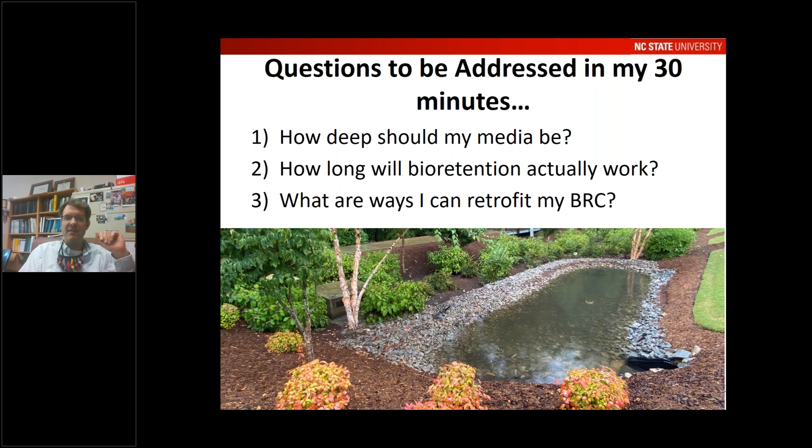Another thing, now that practices have been in the ground for a while, we can much better assess how long the bioretention cells are going to work. So we'll look into that for a little bit, and then I'm going to close with multiple ways that you can take a practice that works well and actually make it work even better. So how can you retrofit a bioretention cell, and what type of benefits do you get out of that retrofit?

So in North Carolina, like much of the Chesapeake Bay to our north, we really worry about nitrogen and phosphorus. It has led to major lake closures. Excess nitrogen and phosphorus leads to hypoxic zones, fish kills, and the like. And as a result, a lot of what we have done in North Carolina has focused on how to better manage nutrients coming off stormwater.

So I want to ask y'all to get some sense of where we're coming from. What pollutant, if you could pick one, do you think sort of motivates the design work or the need for stormwater in your jurisdiction? Jill, I'm going to hand over to you.

We're going to find out what the audience says. Here's our question: in your jurisdiction, what one pollutant's removal concerns you the most? Nutrients, temperature, pathogens, metals, TSS, or other?

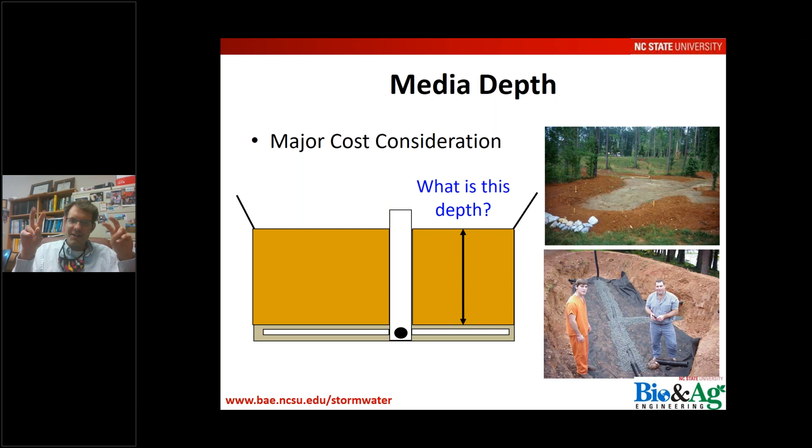And if you were at all involved in bioretention years ago, you knew the answer was 4 feet. That was the default - you got to use 4 feet. Well, first of all, it doesn't really need to be 4 feet much of the time at all, and we'll get into the rationale behind that in a little bit.

When we do decide how deep the media needs to be, it's really predicated upon 3 big factors. One, can your vegetation survive? In fact, not only survive, but in many cases thrive with the amount of media you're providing. Two, are you able to meet hydrologic goals? The more media you have, the better you are able to transition runoff to infiltration or evapotranspiration. Or, what type of water quality needs do you have? What pollutants are you worried about? You're worried about sediment.

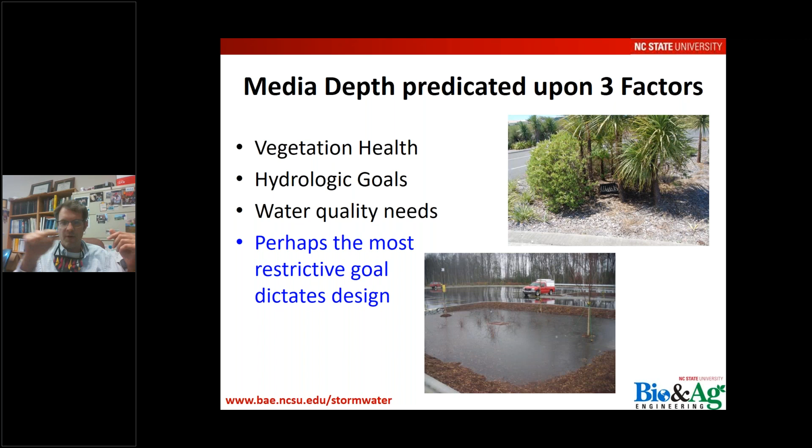But a lot of you are also worried about nitrogen and phosphorus, and a few of you are worried about temperature. Based upon that one pollutant you're worried about, what's your best bet? Whichever answer to those 3 questions - whatever's the most restrictive one - that's the one you're probably going to want to choose.

So let's start off with vegetation depth. Bioretention vegetation actually does not need a ton of media. Grass, which is successfully employed a lot, can handle 1 foot - you can do all right with 1 foot. Shrubs, you add 1.5 feet onto that, and then a tree-shrub mix, the media might be a little bit deeper. Having said that, the deeper you make your media, the more resilient that vegetation is going to be, because there's more moisture available to it during dry periods.

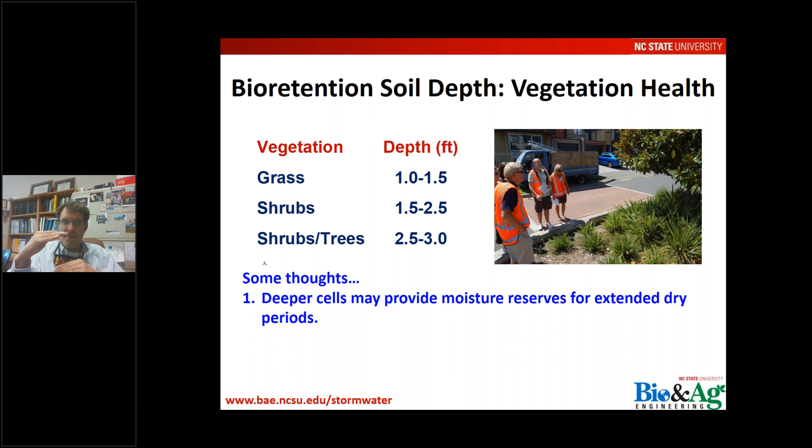But for the most part, we're not observing the vegetation requirement being what dictates that minimum soil depth, which gets us now to the potential for hydrology.

I'm not going to name the big box store that allowed us to study here, but just know there was a big box store that agreed to allow us to do some study at their site.

The purpose of the study initially was to take a look at the benefit of having 2 foot of media versus 3 foot of media as your depth. We also made a retrofit about a year in, which doesn't really show up here, so we actually had 2 sets of monitoring periods. I'm going to talk about data very quickly from both.

What I want you guys to focus on are the 2 depths, the 2 and 3 foot media depth. Before we made this retrofit, when you had a foot of extra media, you put roughly 10% more water into the ground.

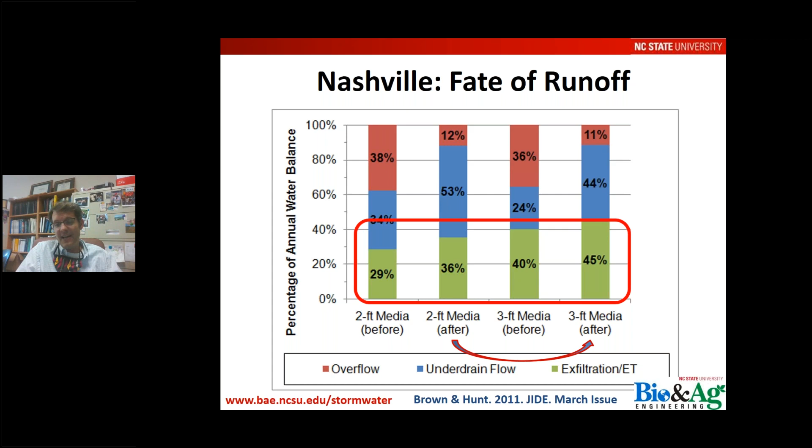After we made our retrofit, we studied it for another year, and again the numbers were different, but we put 10% more water essentially into the ground. So you get some sense of whether that extra 10% of infiltration was worthy of the cost associated with the extra media. Well, that's a site-based situation, but you can at least see that it can matter.

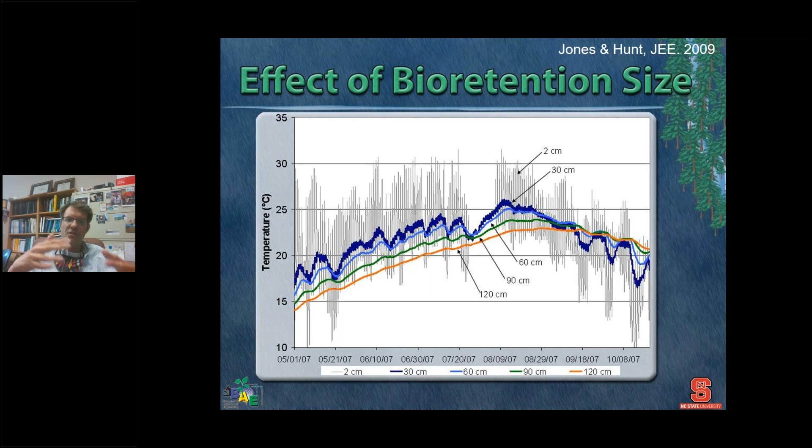Another benefit of having deeper media with respect to certain pollutants is temperature. Only a few of you, maybe 20, are interested in thermal pollution, but you can see here that 120 centimeters or 4 feet deep media gives you cooler and more stable temperatures than 1 foot or 2 foot deep media. So if you're worried about thermal pollution, deeper media certainly does seem to have a legitimate benefit.

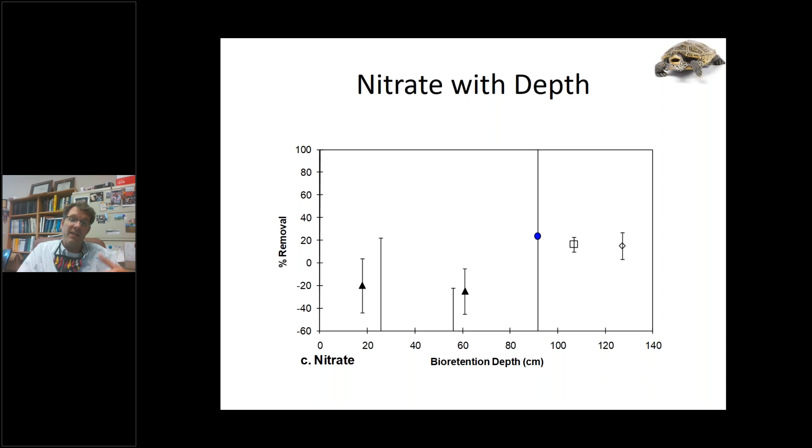Nitrate - this is one of those slides from Dr. Davis, you see a turtle in the upper right-hand corner. After about 3 foot of media, you start seeing some actual reduction in nitrate, whereas with less than 3 foot of media, the nitrate removal was not reliable. So again, this is a case where a pollutant shows more media seems to matter.

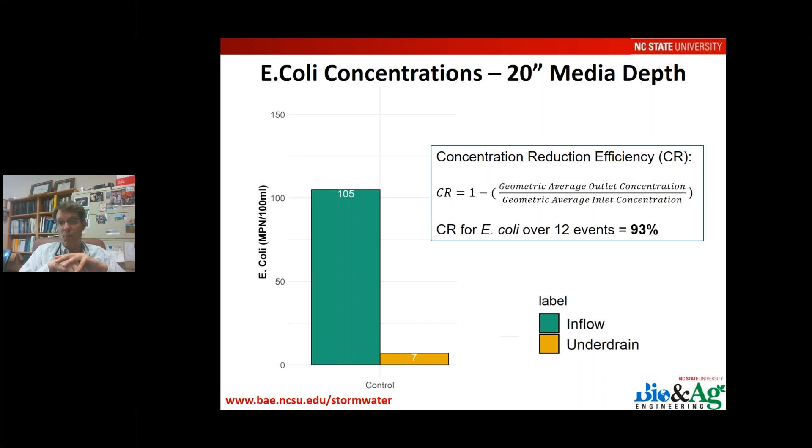We studied a bioretention cell in Wilmington, one of our coastal cities where we have pathogen TMDLs and pathogen concerns. We monitored this one for a little over a year, and it only had 20 inches of media, so it was a very shallow media depth system. And you can see how well it worked - the answer is it worked awesomely. We took out 93% of the E. coli that came in, and the effluent concentration of E. coli was really, really low. So in this case, minor media depth, still great performance.

So really what it comes down to is what pollutants are you worried about. Let's say you're worried about sediment - well, guess where sediment's captured? The surface, right? Sediment gets strained at the surface. So you don't need 4 feet of media to trap sediment. A little bit over half of the phosphorus that's out there hitchhikes with sediment or particulate matter, so if you're straining sediment, you're also straining about half of phosphorus. Now the other third to half of phosphorus is a little more complicated - it's in the dissolved state, and that will tend to get removed in the upper layers of media. So those pollutants tend to get removed at the top or towards the top of the media column.

Now temperature, as I mentioned before, the deeper it is, the better. Nitrogen - deeper systems certainly are better as well. So you'd certainly require more media for trying to remove temperature and nitrogen. But if you get back to pathogens, they get removed at the surface. Metals get removed towards the top of the media, and oils and greases tend to get trapped at the surface and then get broken down.

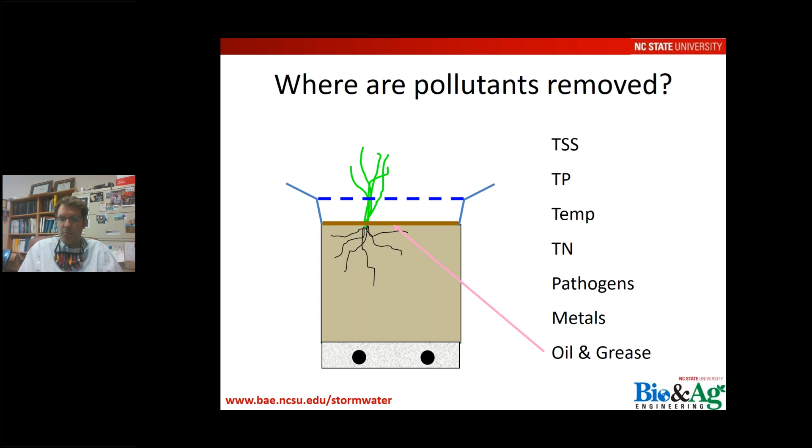So I guess my take-home point is pretty clear: if you need to remove specific pollutants you're trying to remove, that can really dictate how deep your media needs to be.

Now, I know this paper is getting close to a decade old. I still love it - I honestly don't think it's dated. Just a smidge, but for the most part, it's still some work I did with Doctors Davis at Maryland and Traver at Villanova. And we suggest how deep your media depths need to be for certain pollutant removal.

The take-home point for all of this is media depth can absolutely be targeted based upon the type of pollutant you're trying to remove. So sediment and pathogens, shallow systems are going to work fine. If you're trying to get rid of nitrogen or temperature, deeper media depths are going to be needed.

So there's an answer to the first question, which brings us to the second question: I've got this bioretention cell, I've had it for a while, I've been maintaining it okay, is it still working? A lot of people have asked this because, frankly, bioretention cells have been used in Maryland for over 25 years, so these practices are getting a little bit longer in the tooth.

I'm going to answer this question with a couple of studies we did. We did a project in Charlotte, North Carolina's largest city, about 15 years ago, and looked at how well a bioretention cell worked then. Then 11 years after that study, we got a call from my buddies in Charlotte saying this bioretention cell is going to get taken away because they're building a light rail station. Would we be interested in doing some destructive testing, basically digging holes and mapping the surface of the bioretention cell?

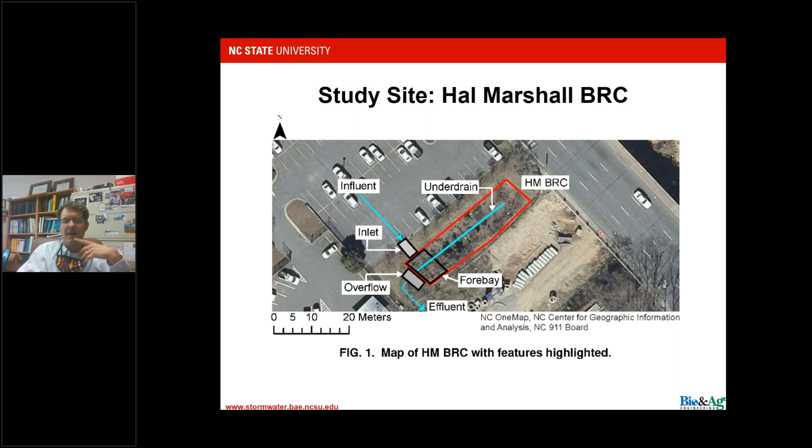This is what the bioretention cell looked like, per NC OneMap, North Carolina. Water came in from the parking lot, entered a forebay, spread out across the footprint of the bioretention cell, and if the water level got sufficiently deep, it overflowed. You can see the student going down there collecting samples, digging holes, sending these things off to the NCDA lab and the like.

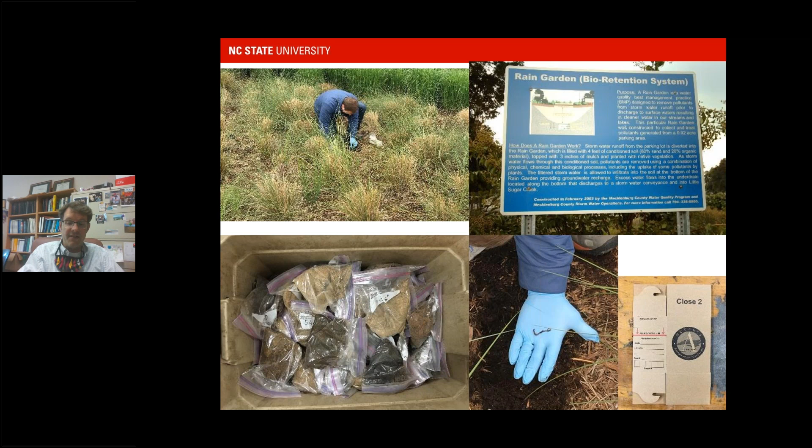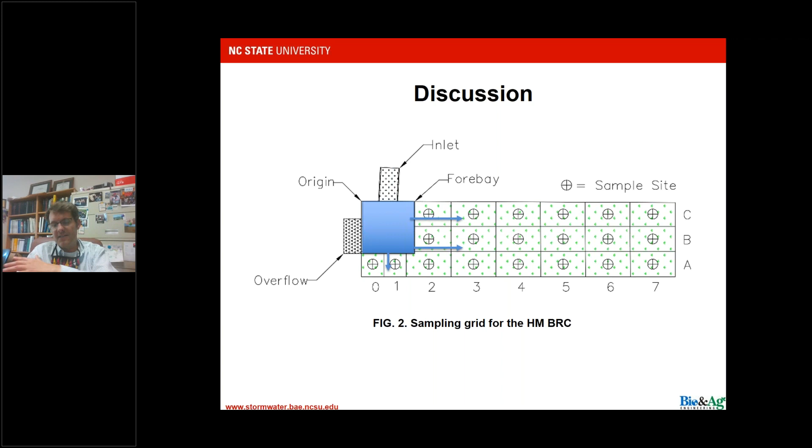He took samples from everywhere you see the bullseye, from the forebay, which is just getting covered up now, and from the balance of that bioretention cell. From that information we were able to create a heat map, which shows you where you have high concentrations versus not having high concentrations of pollutants.

We looked at zinc, copper, phosphorus, and humic matter. Anywhere that's green means you've got plenty of capacity to capture that copper, zinc, or phosphorus. Anywhere that's red means you're getting close to the edge of capacity, and yellow is somewhere in between.

If I go ahead and place that forebay on here, boop, there it is, you can see that the forebay makes a huge difference in terms of the heat map. That's where the pollutants are being trapped. So if you have a forebay and the pollutants are being trapped there, and you do occasional maintenance to suck out the accumulated sediment, that means you're prolonging the life of the rest of the media, which at this point in time is green.

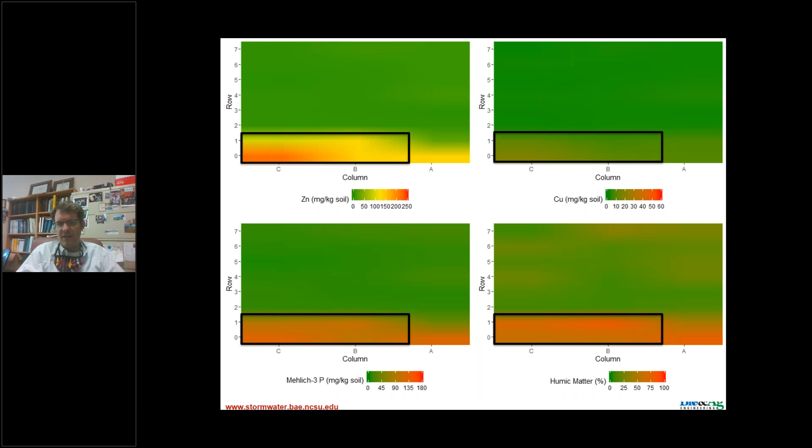We did a calculation based upon the pollutant loadings we had looked at from 11 years prior, and you can see these systems are going to last a long time. You see 300 - we actually had to recalculate it and the numbers aren't quite right. It's still like 500 years, 100 to 500 years. In other words, we're all going to be gone. The zinc and copper are not going to fill this media up while we are upright on this earth.

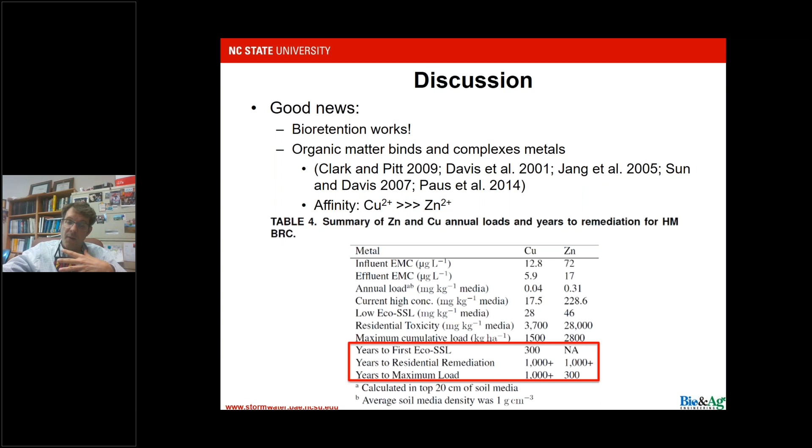So long story short, the inclusion of a forebay means a bioretention cell can work a pretty darn long time at removing things like metals, which about 8% of you were concerned about. So we have excess capacity, particularly for metals.

But what does it mean from a nitrogen and phosphorus standpoint? Does a bioretention cell work long-term for nitrogen and phosphorus? So another chance to go back and take a look at an old project.

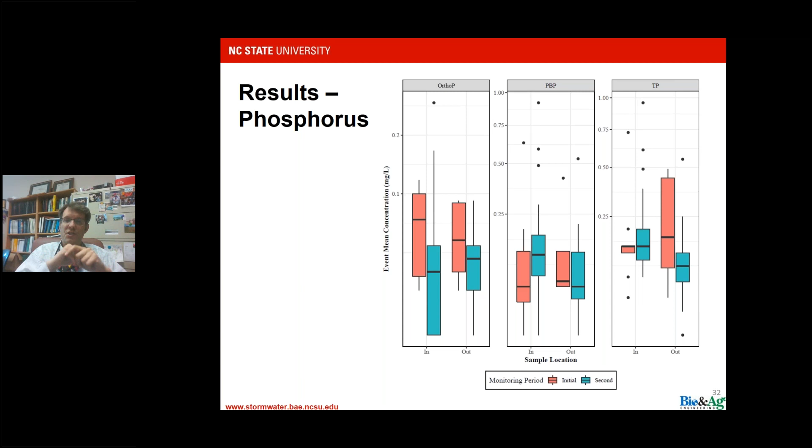It shows up again with phosphorus. Look at the box to the right - that's total phosphorus. You see the red, the concentration of phosphorus actually goes up in 2001, 2002. Without anything other than maintenance being done, the concentrations go down in 2016, 2017. Long story short, this bioretention cell works better with time.

So why is that happening? The number one thing we attribute it to is the maturation of vegetation. Vegetation is our long-term friend, and it's proving to be perhaps the single most important factor to long-term resiliency, not just of bioretention cells, but other stormwater control measures in general. If you want a resilient stormwater control measure, you'd like to see some vegetation in it, certainly for a surface stormwater control measure like bioretention.

Now, what does this mean in the end? Well, it means that when we start setting standards for how well a bioretention cell will work in a certain jurisdiction, it's often based on research done in that jurisdiction. And that research tends to be done on newly installed practices for various reasons.

But what we've gotten a glimpse of is that perhaps these initial assessments are actually undervaluing how well bioretention works over the long term - that we may be getting even more for our money than we've credited ourselves for. It's good to know, good to know.

Now, we also took a look at bioretention cell media as it aged. We looked at 28 sites, from 1-year-old cells to 18-year-old bioretention cells, to get some sense of the content of the media and answer some questions from a design perspective.

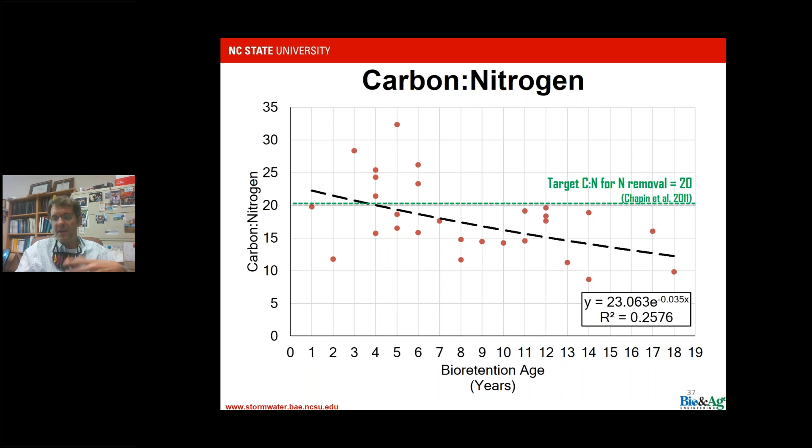Now, the other thing we're able to do with those data, which by the way suggests they're able to work for a longer period of time, is run a random forest - like a decision tree, but fancy computer stuff.

You can take a look at the most important factors associated with higher carbon-to-nitrogen ratios or lower levels of embedded phosphorus in the media. You can see things like a forebay stands out - if you have a forebay, that means the balance of your bioretention cell likely has a more favorable carbon-to-nitrogen ratio for nitrogen removal. And if you have deeper media depth, this shouldn't come as a shock, you're likely to have lower phosphorus saturation across the broad spectrum of your media.

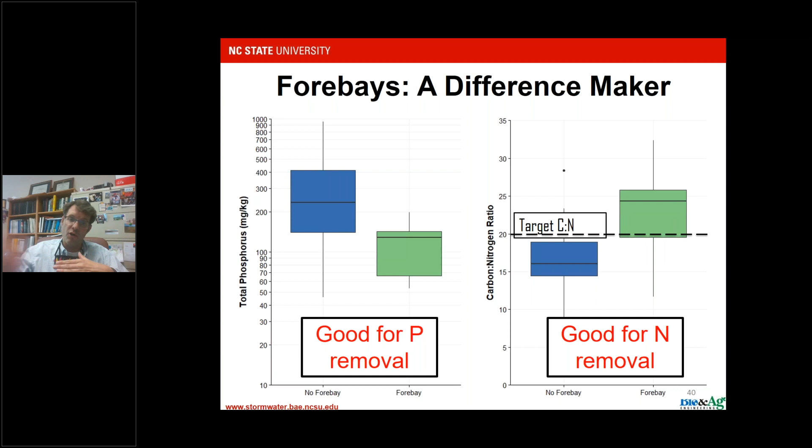One thing that stands out for both of these is the presence of a forebay. If you have a forebay in a bioretention cell, you tend to have lower fractions of phosphorus in the balance of the cell's media, and higher carbon to nitrogen ratios in the balance of the cell's media. So a forebay certainly does appear to matter.

If you're trying to get a bioretention cell to work for a longer period of time, the inclusion of a forebay seems to matter. Which gets us to a discussion on retrofits, and what are some things you can do to take a practice that, I'm just going to be honest, works well to begin with. Bioretention, part of the reason it came to be and has stuck around so long is it works well. That's the reason why things like Filterra work so well—it's modeled, it's a rapid flow bioretention system. So we know these systems, bioretention or a version of it like Filterra, are going to work well for a long period. The question is can you make some of these systems work better?

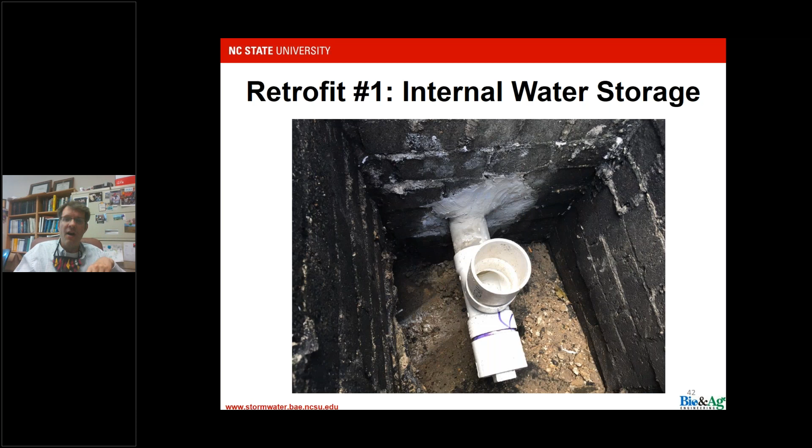I'm going to talk about 4 different retrofits to look at. The first and foremost, which I think is the cheapest and easiest, is something called internal water storage. You're like, okay Bill Hunt, what is internal water storage? We're going to start off by describing what it is a change from, and it's a change from normal under drainage. Here, take a quick look at that.

I got to wet those vocal cords.

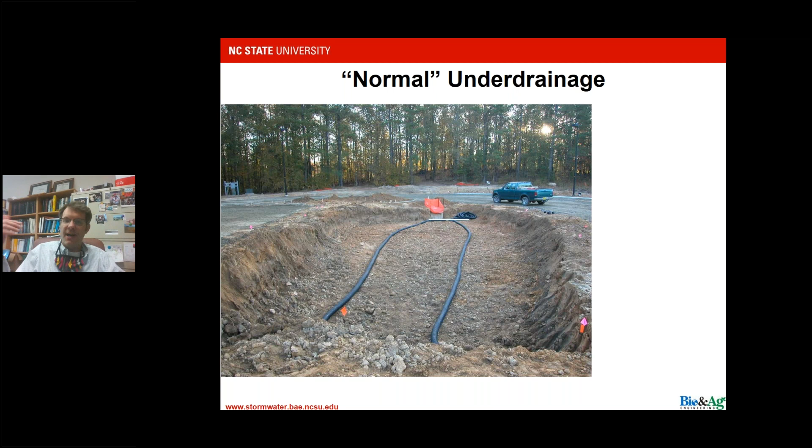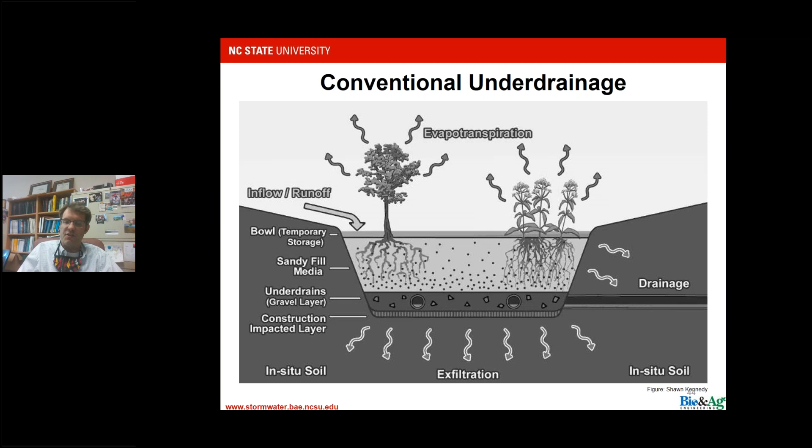So you can see the under drainage ties into the drop inlet. You put your gravel on it. This is the standard under drainage that we've got. It looks like this. This is what most jurisdictions have had in their design 20 years ago, 15 years ago. But we are seeing some jurisdictions, for example in North Carolina, that require a change.

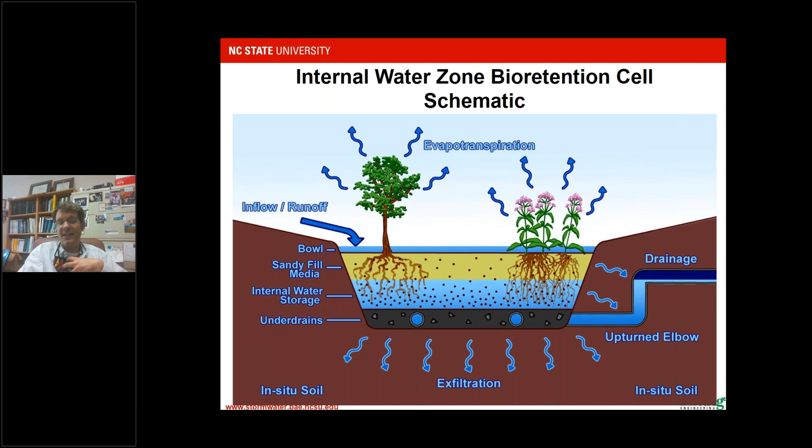And the change is simple. That under drain, instead of tying directly in at that same elevation into the drop structure, you want to elevate that under drain before it ties into the storm drain network. The idea behind it is you basically create a zone internal to the cell that stores water. This practice goes by another name, called saturated zone, in some parts of the world. I do not call it saturated because you'll see that sometimes when we do it, the media just does not stay saturated—you don't have prolonged saturated conditions. You'll hear some people call it a saturated zone. That might be all right, but I personally like internal water storage because it doesn't assume saturation.

So what does it look like when you look at it as it's being constructed? Here's an example. You see these under drains, you can see the upturned elbow essentially in it. This will get buried with media. This is not the type of design that we recommend now—this is an earlier version. It's a little harder to work on if you have to dig to get to it.

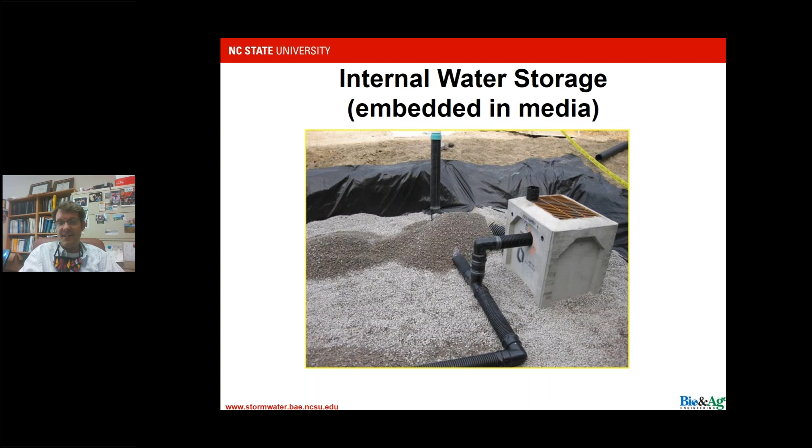An easier version is when you tie in a T or an elbow in your outlet structure and basically force the elevation to occur from your outlet structure. You can see that occurring with the T right here, a little bit of a standpipe, and the elevation that the water is spilling out—you can take that elevation and just go right onto the cell and understand that you have gravel saturated and some fraction of your media saturated at that elevation. It's really that easy, okay?

It is an option that you can employ during construction. In North Carolina, it is a requirement, so it's not a retrofit in our state anymore—I mean, it can be, but new systems have to have it. But as a retrofit, it's a very easy one. You can actually see the elbows constructed before they're appended onto or placed onto the existing under drainage as it came into the outlet structure there. So it's a very simple retrofit.

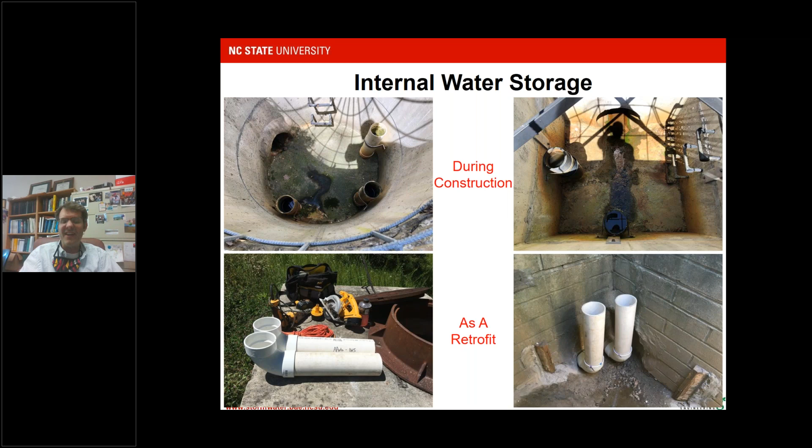So again, why are we a big fan of it? Well, you can imagine if you put internal water storage in, all of a sudden you are capturing a fair amount of water and temporarily storing it in a gravel storage zone in the bottom layers of your media.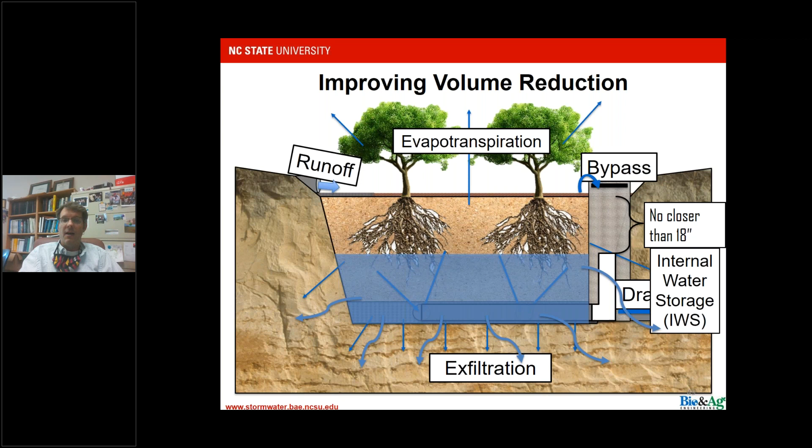And that water has a great opportunity to exfiltrate into the underlying soil. In the end, including internal water storage has proven in North Carolina to be a great infiltration or exfiltration enhancer. Let me demonstrate that for you.

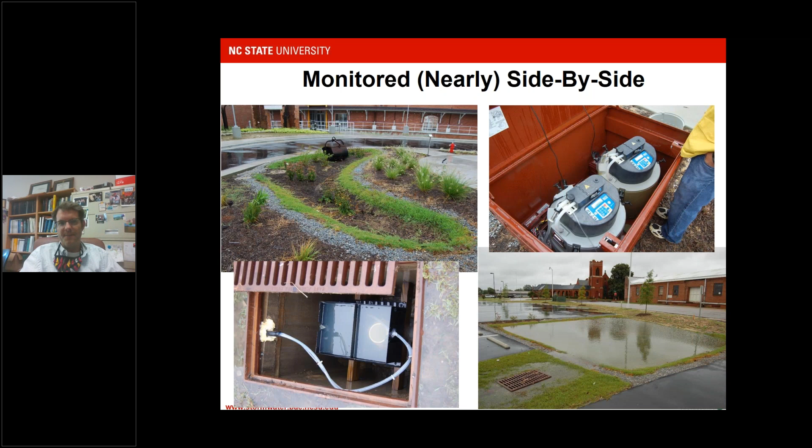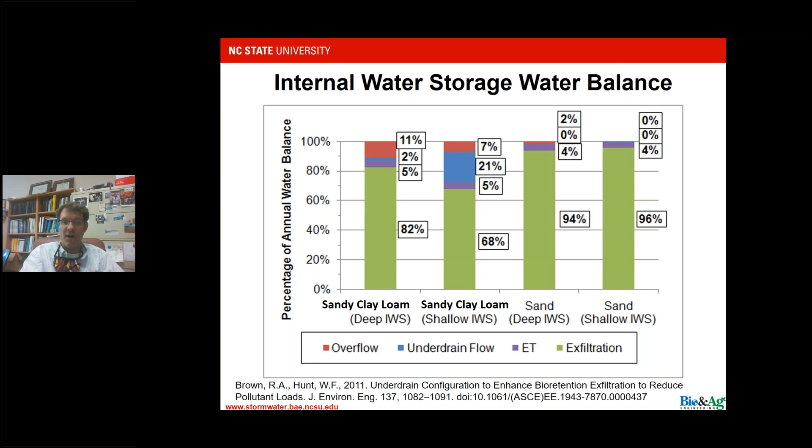Now I'm going to take that exact same site, and all I'm going to do is put an internal water storage zone. Put an elbow on there, create internal water storage, and instead of reducing about 10% of the volume, we're reducing between 35 and 40% of the volume. That's a big difference.

Let's say a 3.5 time multiplier by making a very low investment. We'll talk about how inexpensive we think it is in a little bit.

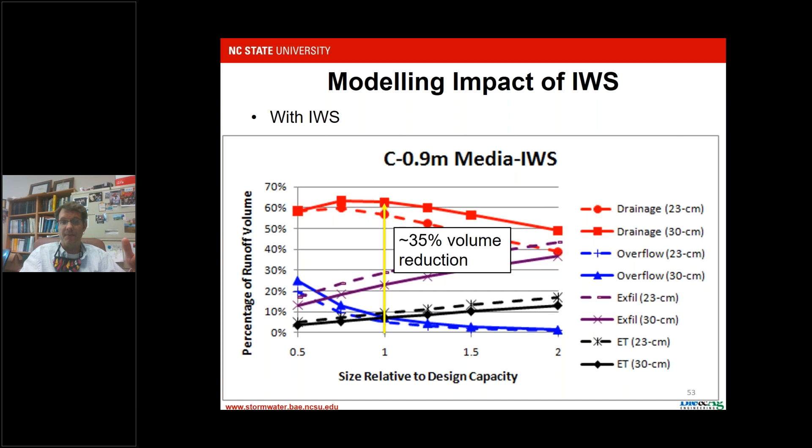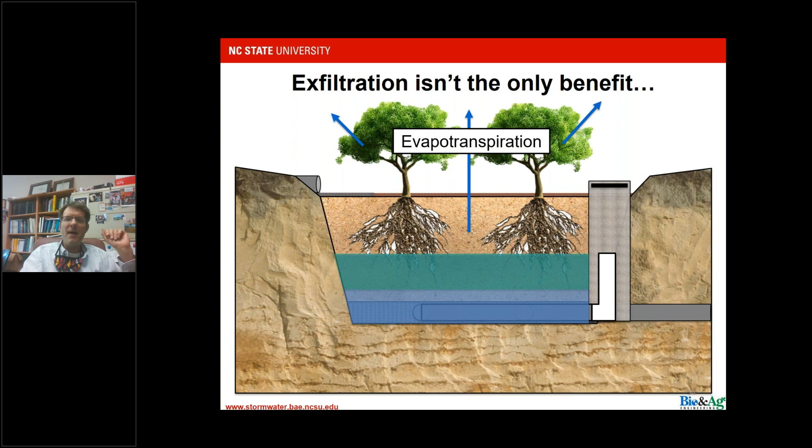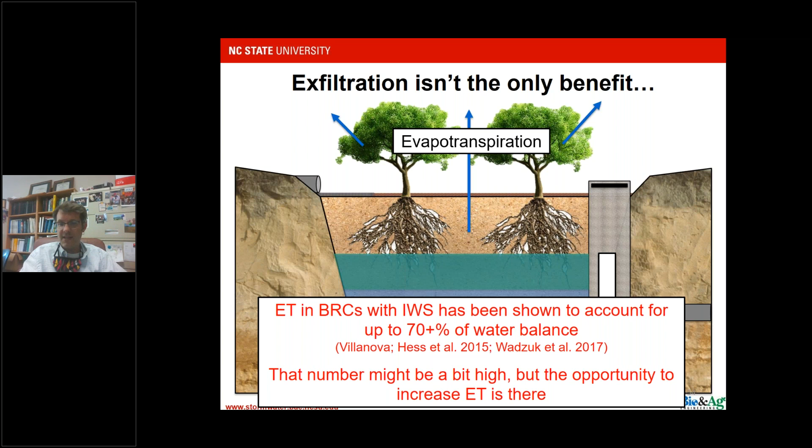Exfiltration is not the only benefit, I might add. There's been some work done at Villanova University with a closed system or a lined system, where they had massive amounts of evapotranspiration because you're keeping more water present in the root zones. That number is probably, I'd bet most of the money in my wallet, higher than what you get in a normal field site, but still the benefit is there: increased evapotranspiration.

Another benefit is that when you keep water ponded internally in a cell for a while, you actually get reduced nitrogen. We did a meta-analysis where we took a look at all the bioretention studies in and around North Carolina that had conventional drainage, comparing nitrogen concentration reduction versus internal water storage zone bioretention cells, and you can see it's like an improvement of a factor of 5. Bioretention with internal water storage knocks down nitrogen concentrations at a very high clip.

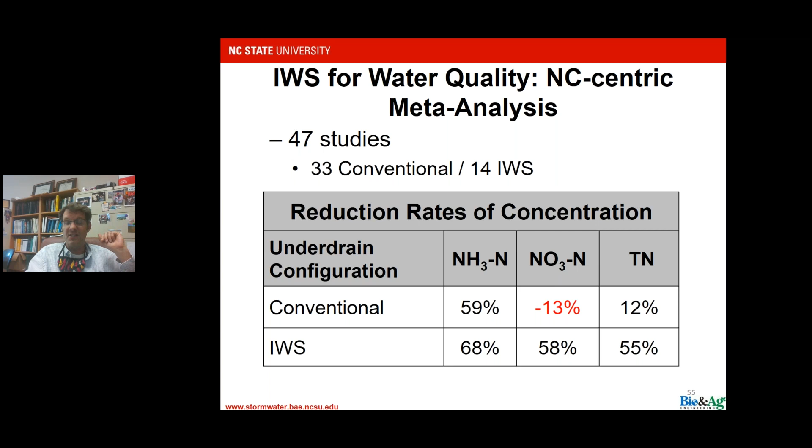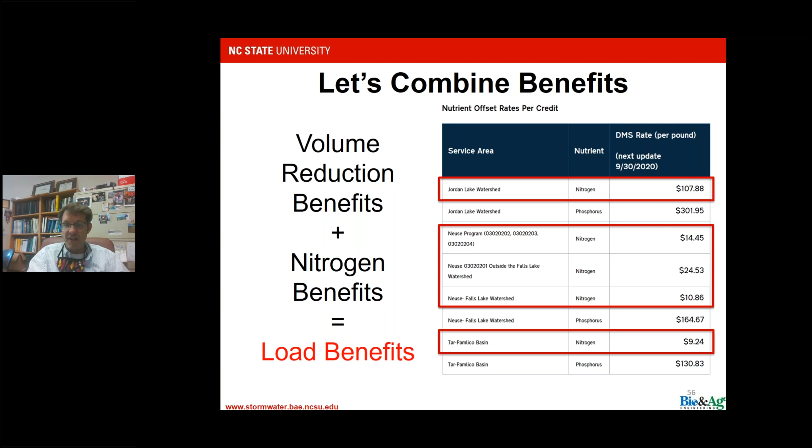So when you take in the benefits associated with, one, reducing your volume, so you have less volume leaving your bioretention cell, and two, knocking down the concentration, you multiply the volume and the concentration, the lower, you get massive load improvements. And in places where there's nitrogen and phosphorus markets, you can sell this stuff. So there is a real financial motivation here.

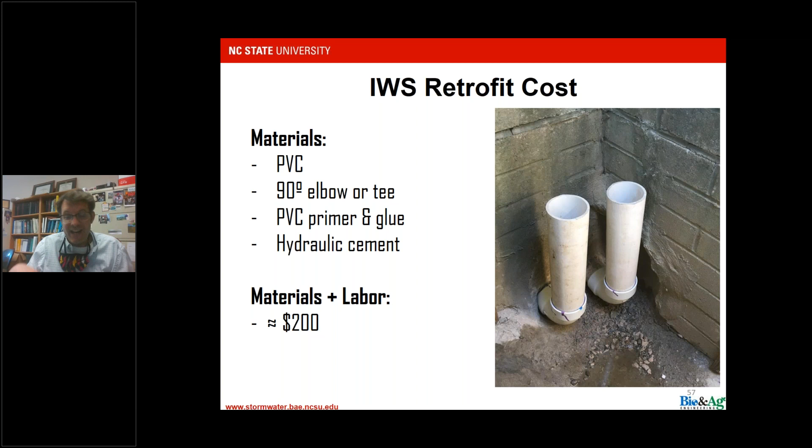Now, how much does it cost to put PVC pipes on the end of your under drain? Not a whole lot. I honestly think $200 is being cautious, I think it's less. In fact, if I had a grad student do it, it would cost about $18.47.

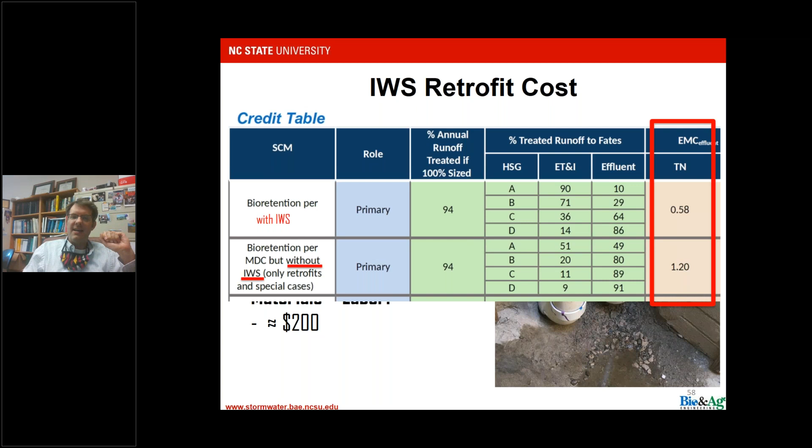But it's here. Now, North Carolina actually has mechanisms to help encourage these retrofits to occur. I won't get into that unless we have some Q&A addressing it later. But the point is that there are some statewide jurisdictions now where this type of retrofit really can get some steam.

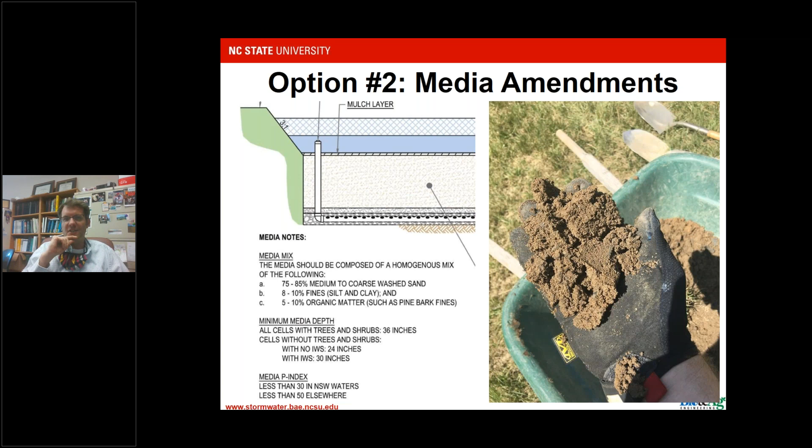A second option for retrofitting a bioretention cell is to add a media. Most of this research has actually been done by colleagues either at the University of Maryland or at the University of Minnesota, both great schools, great stormwater researchers there.

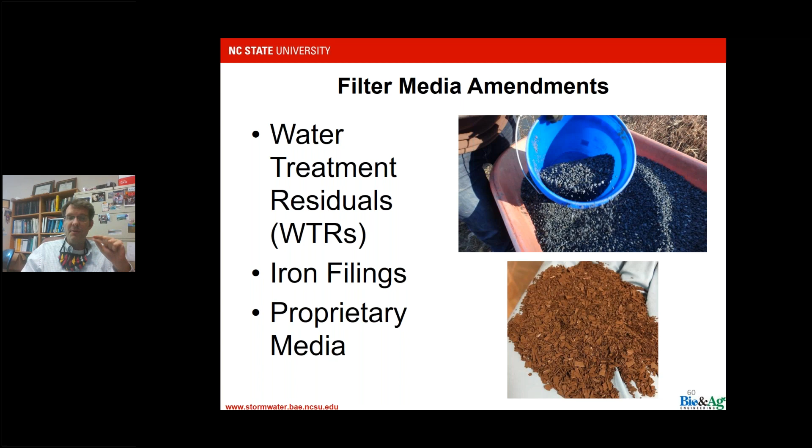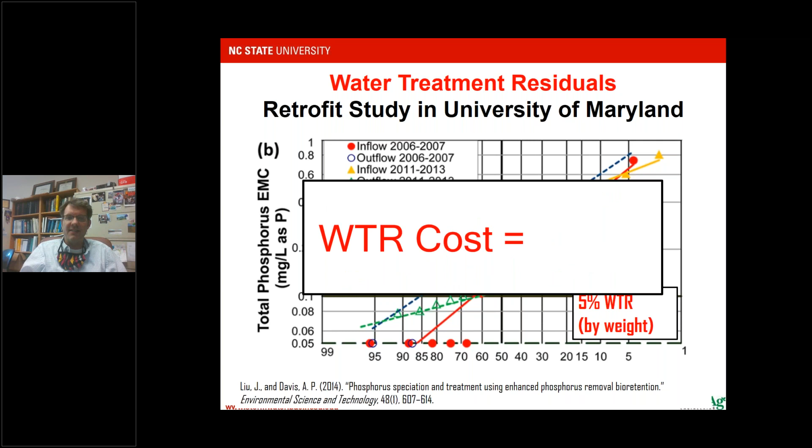So clearly the addition of a water treatment residual that can help capture dissolved phosphorus is a worthwhile retrofit in certain, especially phosphorus sensitive watershed bioretention cells. You might be asking, how expensive is it? Well, the answer is free. It is a waste product. Now, to be fair, you do have to get it from the water treatment plant to your cell, but this is a waste product and they're just happy to get rid of it.

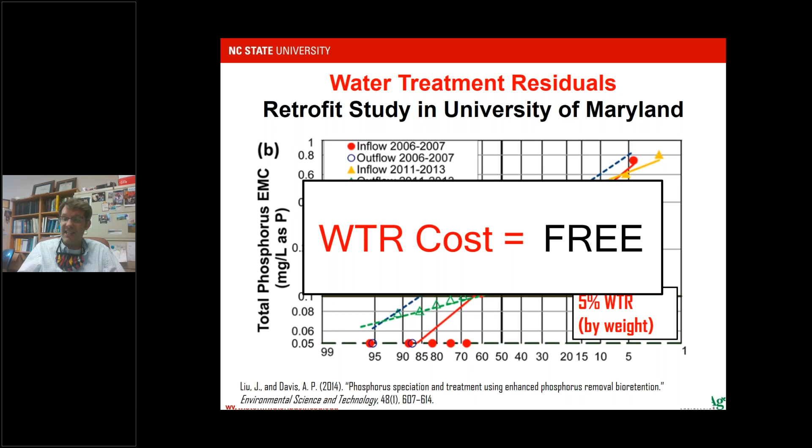The biggest issue with it right now is it's hard to spec it. Different water treatment processes will produce different types of water treatment residuals, but they almost all are going to be based in aluminum, and therefore, on the surface at least, makes sense as an addition or addendum to a bioretention cell.

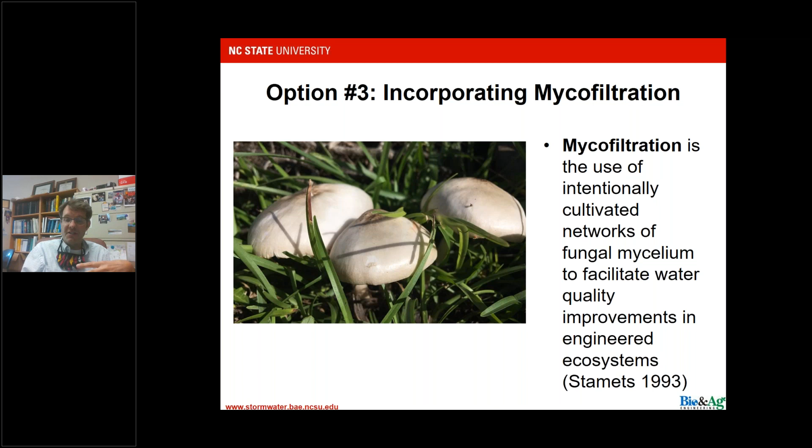Now, a third option is to put mushrooms. Some people, mushrooms have gained interest for all sorts of reasons. My specific mushroom interest is the stormwater. And the idea is if you put mycelium or mycelia in a bioretention cell, can you improve certain removal efficiencies of pollutants for certain pollutants? There's different ones to select. We particularly went with the tiger sawgill mushroom, Lentinus tigrinus.

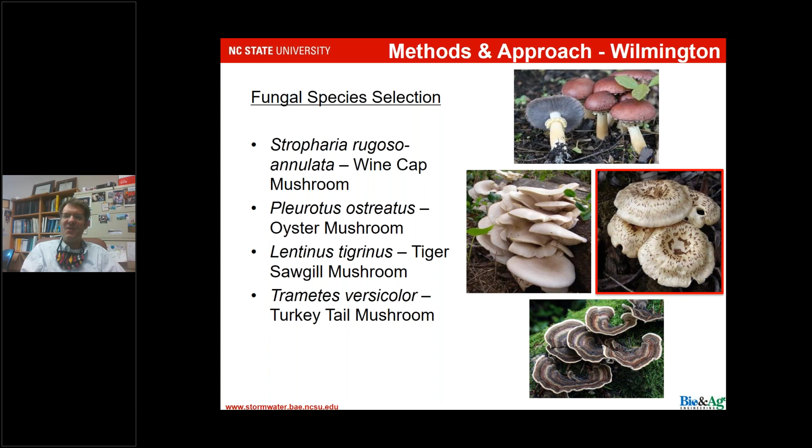Sounds pretty fancy. The way it was done is they took the spawn, mixed it with sawdust, and after that was well mixed, they put it into a hardwood chip and inoculated hardwood chips with it. Then they took that mix and put it into a jute mat and rolled it up to create these wattles. They cared for the wattles, watered them, and after two months, we brought it down to the research site in Wilmington, and you can see what it looked like.

No, it is not the most attractive retrofit, I will grant you that, but it was a grass cell with these wattles, and you can see what it looked like after as we were monitoring it.

Just keep in mind that we monitored the site for a year, a little bit over a year actually, and then put these retrofits in, gave them a little bit of time to get acclimated, and then we monitored it again to take a look to see how much additional improvement we got for removing pathogens, and the answer is none. Now, it didn't make it worse, but we sort of were bitten by the fact that the bioretention cell worked great before we did any retrofits, and to be fair, it's hard to make great better, and we didn't. We did not improve great.

So the jury is still out on this. We're actually looking at the same type of study at a pair of cells in Raleigh, and we're looking at nitrogen and phosphorus, particularly in that cell. We'll have those data at the end of the summer.

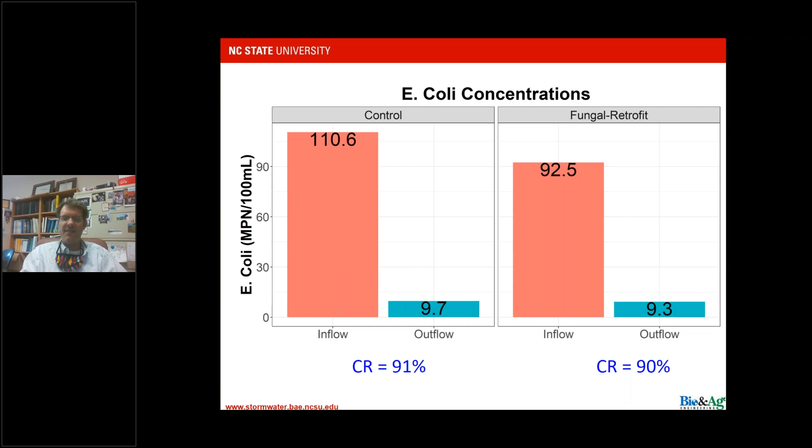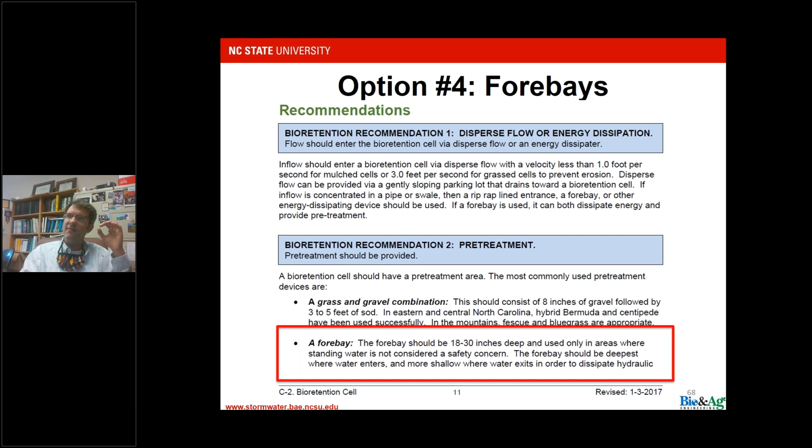The last option for retrofitting is something I teased earlier, forebays. Forebays are not required, but they're recommended. We think if there is a single input to a bioretention cell, that it really probably should be a requirement. Forebays have a wide variety of appearance, some of them more attractive than others. They can become wetlands, for example. We won't get into the trials and tribulations of forebays, but including them does make a difference.

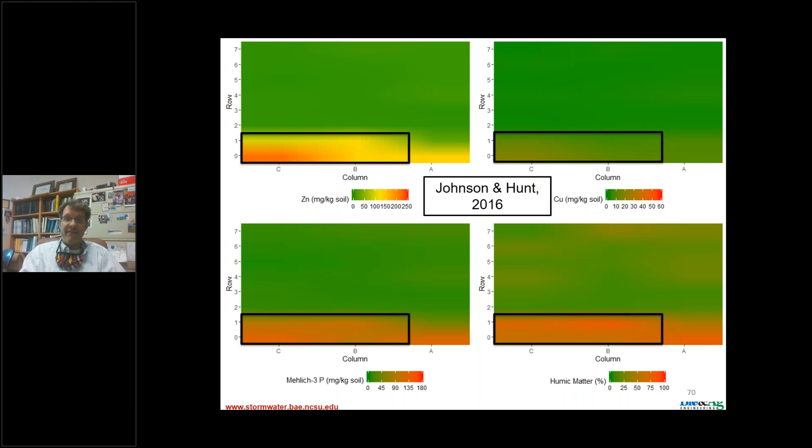As we talked about, if you include a forebay, you preserve the life of the media for other pollutants, which makes a lot of sense. If you include a forebay, you'll have more capacity for phosphorus removal, and it appears you also have better conditions for nitrogen removal. So forebays seem to be a potential retrofit.

So if I'm going to summarize those retrofit options, I spent a lot of time on internal water storage. There is a reason, because it's cheap, it's easy, and it works. Media amendments, particularly if you're worried about getting rid of phosphorus, using a water treatment residual is a pretty inexpensive and relatively easy way of making your bioretention cell do a better job of removing phosphorus. And forebays are a more expensive option, but it is a retrofit option where it presents itself.

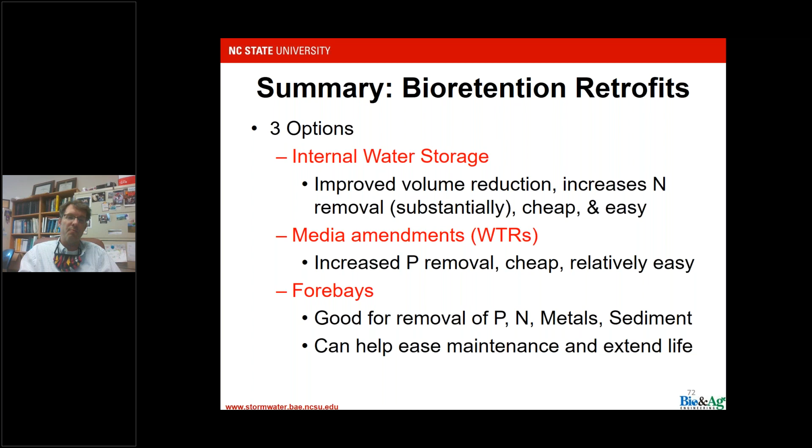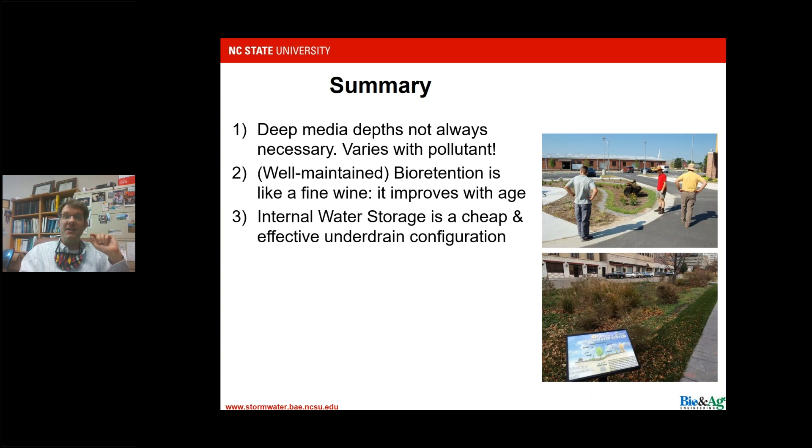All right, bioretention cells like a fine wine. It improves with age, particularly if it's appropriately maintained. Internal water storage is a great retrofit opportunity. Water treatment residuals are quite good.

Forebays where it's appropriate, and we don't know enough yet on mushrooms, frankly, because the study was inconclusive. But that is an area of future research.

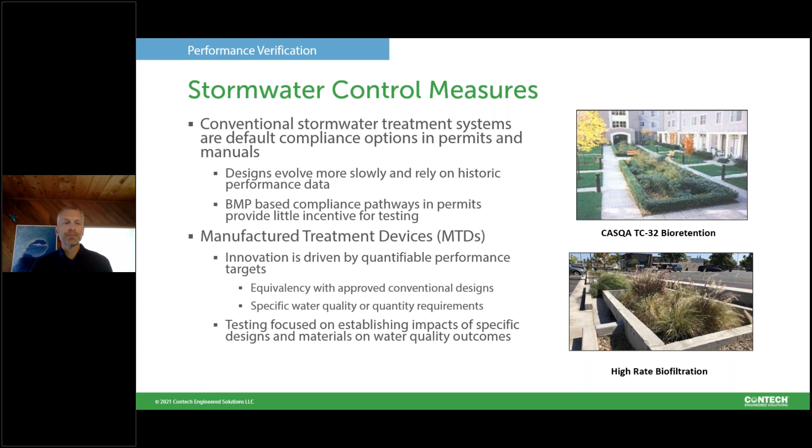And there is a robust community of researchers working on these questions and optimizing and developing new treatment systems. If you look across the industry, it's a pretty puzzling picture sometimes to try to wade through all the different bits of research and try to compare one to another.

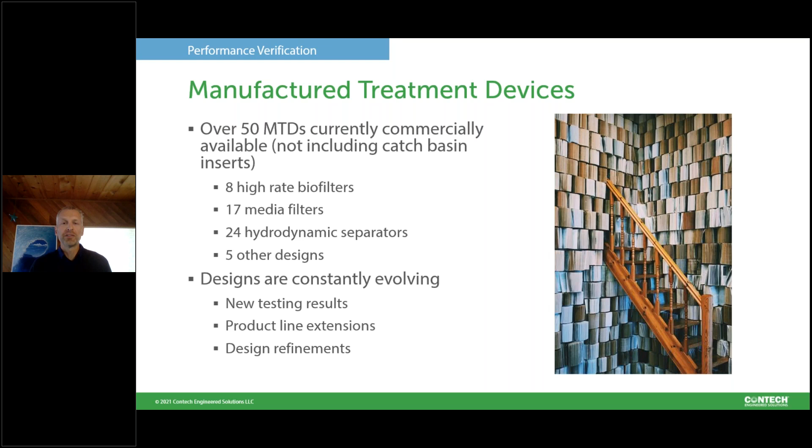There are over 50 manufactured treatment devices out there that are currently marketed, and that's before you start counting all the catch basin inserts and inlet excluders and other types of systems. And these systems are constantly evolving, so it can be a challenge to keep up with the research.

Thankfully, there are verification and certification programs out there that we can borrow information from that are doing a deep dive into the data to make sure that whatever performance claims are made are actually met, at least in the water quality testing done to get these certifications.

In the previous webinar, we talked a little bit about the Washington TAPE program and the New Jersey program. So I'm not going to go into those specific programs much, except to note that there are verification and certification steps for each, and those steps are different.

Verification is really concerned with answering the basic question: was a treatment system tested following a specific protocol, or Quality Assurance Project Plan (QAPP), as we like to call it? And if so, was the performance claim that was made actually met?

That performance claim can really be water quality, hydraulics—like did you reduce peak flows or infiltrate a certain amount of water as expected—or longevity. Did you meet your minimum maintenance interval, or achieve the load capacity of sediment, for example, on the surface of a bioretention cell?

Typically these verification processes have a peer review process where you should have an independent body verifying the data—reviewing the protocol, the test results, and essentially confirming that those results are accurate.

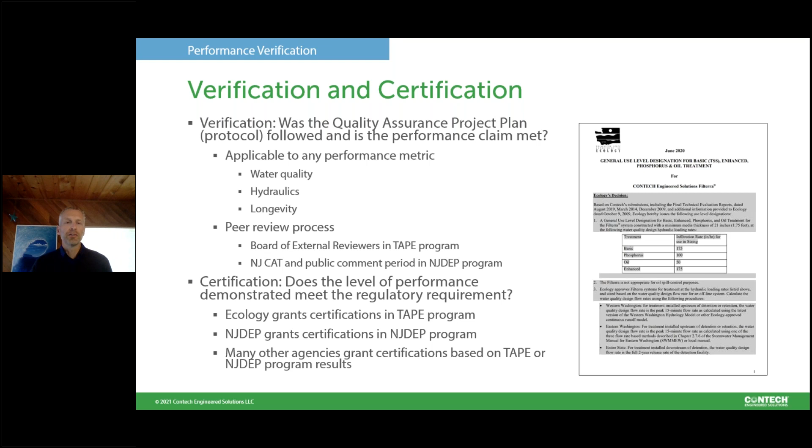The point of all this is just to say that you don't necessarily have to dig into all the data, which can be very hard to compare one to another, especially if collected following different protocols. You can go to those verification and certification resources, especially the ones listed here, and make a lot less work for yourself.

The first trend is the increased reliance on standardized protocols and verification processes. As I look at stormwater, especially compared to wastewater and drinking water, our sister industries, stormwater really feels like a fledgling industry, almost in its infancy, where we're just now getting to the point where we have standardized testing requirements and protocols.

Just this past year, ASTM has formed a Stormwater Control Measures committee to deal specifically with stormwater control measures. To me that's a great step forward, moving us toward more standardized research and results, which I think is helpful for everybody.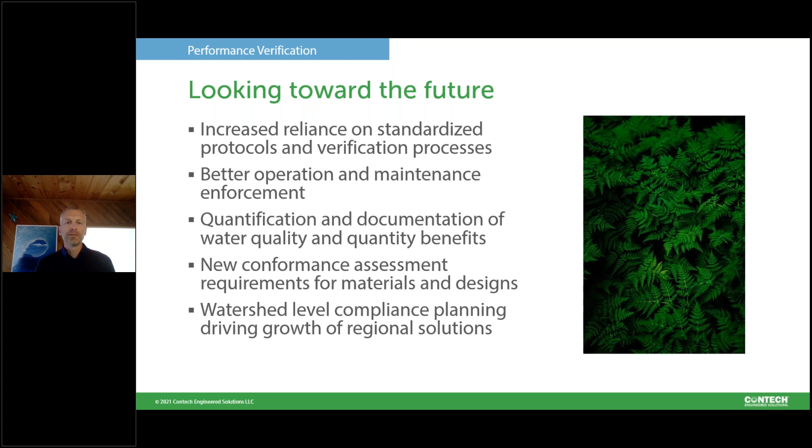So with that, I'm going to turn it over to Tamara, and look forward to questions at the end.

Hi everybody, thank you so much, Faco. I'm Tamara Mammon, and I will be going over a few case studies that showcase how Contech can help on these large regional scale projects using our Filterra biofilter.

Using tested, verified biofilters on regional projects helps minimize risk on treatment, installation, and maintenance issues. The city of Redmond, Washington lists six key benefits to using a regional scale approach of design: it maximizes utilization of usable land, reduces total capital costs and operation and maintenance costs, provides higher assurance of system maintenance due to centralization, and offers retrofit potential for existing areas with aesthetic, communal, and other benefits.

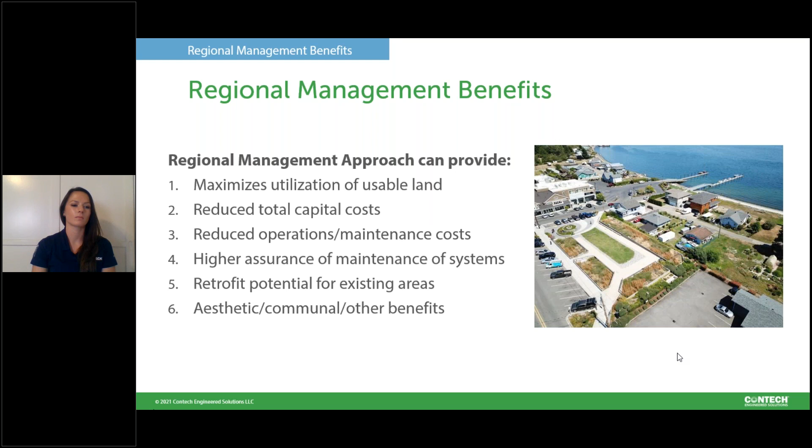The first case study we'll talk about is at University of Washington along the Tacoma Prairie Line Trail. This was installed in summer of 2014 and was the first regional stormwater facility to be installed using high-flow biofiltration.

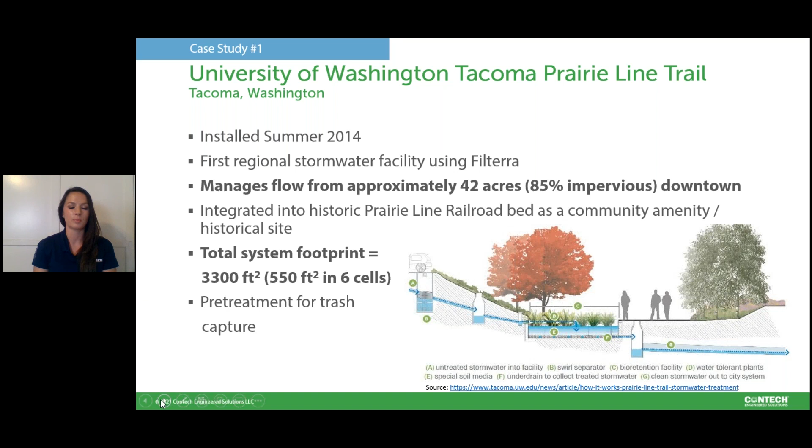The system manages the flow from approximately 42 acres, sized at 85% imperviousness, and has a total system footprint of 3,300 square feet, which is divided into 6 cells. There was a pretreatment unit used prior to the biofilter to remove trash and larger particles.

3 alternatives were explored for this project: underground detention storage and manufactured filters, traditional rain gardens, and Filterra. Traditional rain gardens could not be used since there was not enough space at grade to fit the system. Only 78% of the annual runoff volume could be treated in the available area when 91% was required.

High rate biofiltration could treat the 91% annual runoff volume, and it would only have a footprint of the 3,300 square feet. So using the smaller footprint also led to drastic maintenance savings, which is ultimately the reason why Filterra was pursued for this project.

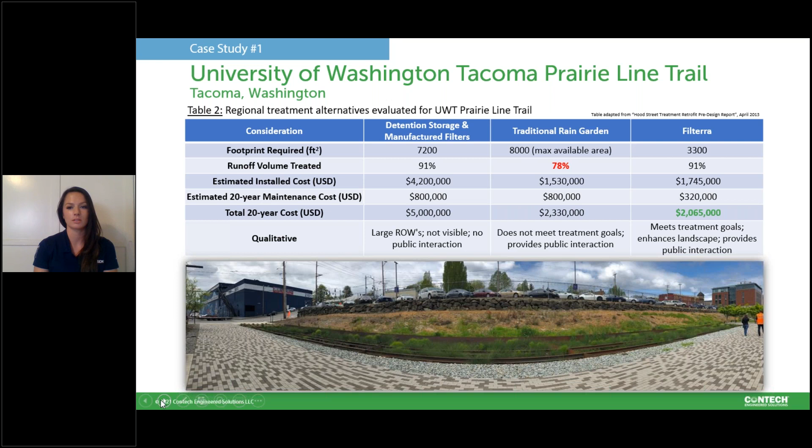The second project we'll discuss also is installed in Tacoma, Washington. It is called Point Defiance Park. Now, this project treats 754 acres of mixed use and residential area, so a much larger scale than the previous one we discussed. There are 9 cast-in-place units that are tiered into the hillside.

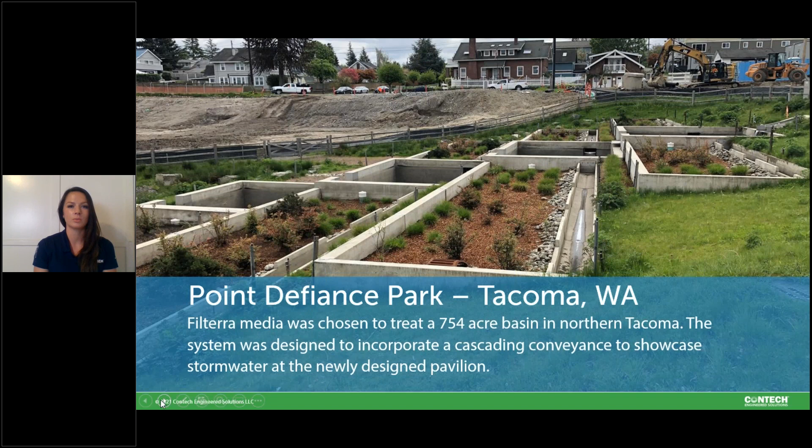These units use cascading inlet bays to collect and divert the flows to each individual cell, as you will call them.

Point Defiance Park was installed in fall of 2015, and it uses the steep topography of the site to assist in the flow distribution, as well as having specially designed flow controls to allow for exact calibration, which you can see in the picture below.

In order to manage the 754 acres, designed at 50% imperviousness, the total system footprint needed to be 5,500 square feet, and these were divided into 9 cells.

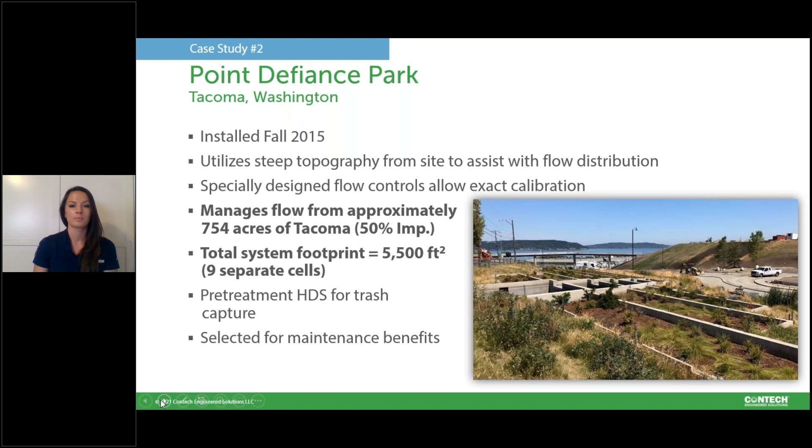A CDS unit was used for pretreatment prior to the biofilter on this project, similar to the last one, and similar to the last one was also selected for its maintenance benefits.

So alternative considerations on this project were traditional improvements like a pond, rain gardens, and Filterra. Again, due to the sheer size needed to treat the 754 acres, the pond and traditional rain garden options were not feasible, with both footprints much too large to fit in the space available.

A decentralized approach was looked at for the rain gardens, and it would encompass 300 units spread across the entire basin. So while the 91% annual runoff volume could be treated using the 300 decentralized units, the maintenance costs were exorbitant and made the $85 million 20-year life cycle cost infeasible.

Filterra was the clear choice on this award-winning project because it could meet the annual runoff volume treatment requirement of 91% with an installed cost of $1.5 million and a 20-year life cycle cost of $2.2 million.

Some feedback we got from the City of Tacoma maintenance crew is that they love maintaining the one centralized unit, and it typically takes them 1 to 2 days versus having multiple units scattered throughout the city.

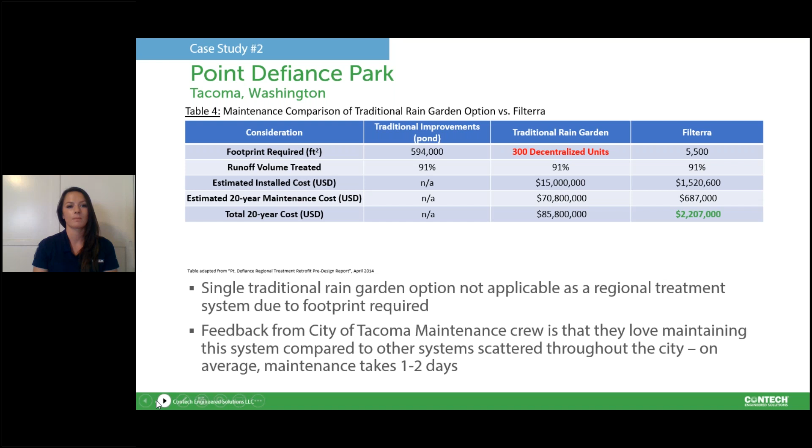The final case study we'll touch on is Avion Burbank. So instead of pursuing one large biofiltration facility, like the last 2 we discussed, this one uses multiple standard vaults. Avion Burbank is a 60-acre mixed-use development that installed clusters of offline Filterras in parallel, and was sticking close to the standard designs.

This helped meet the tight timeline on this large commercial warehouse project. We're starting to see more and more of these projects with tight timelines as e-commerce continues to rapidly grow.

Avion was installed last summer and has 42 offline Filterras and 2 Filterra internal bypass curb units. All these Filterras were sized to be alternates to attachment H of the LA County MS4.

So during the design phase, the stormwater consultant reviewed site plans with the engineer of record and provided product recommendations. Simultaneously, the stormwater design engineer was working on the site-specific details. When it came time for construction, the project coordinator managed all the manufacturing and delivery details with the contractor, and we had on-site field consultants to oversee the supervision of installation.

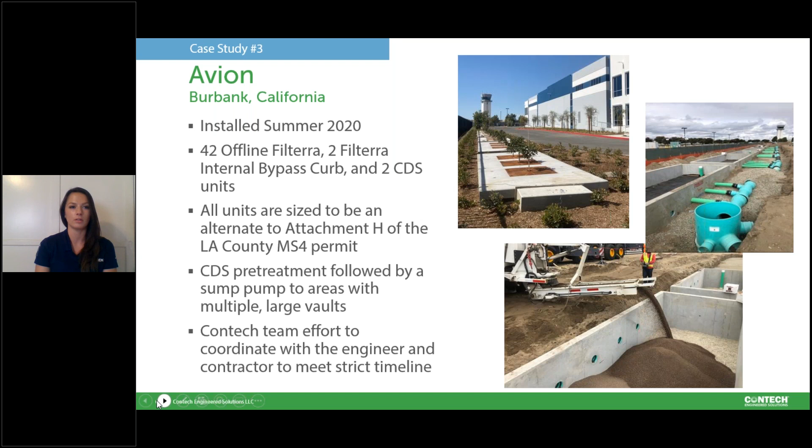Thank you so much. Thank you, Tamara. So yeah, just a reminder, if you have a question, type it in the box and I will ask it at this time. Looks like most of these are for you, Dr. Hunt, so I hope you're ready.

Are these results affected by seasonal variations? If the retention cell results are vegetation dependent, what happens when the vegetation goes dormant?

That's a great question. It depends on the pollutant, but the answer is yes. We have seen the systems do not work as well in the winter as they do in the summer, spring, and fall. Fortunately, we look at annual load reduction as our metric, and the good performance of summer does outweigh, even more than balance out, the poorer performance during winter. But that's for nitrogen. For other pollutants like sediment, it works pretty much the same way all year long. So it's really only for biological processes that winter makes a difference.

Nitrogen being first and foremost, and to a lesser extent, pathogens. Pathogen removal is not as good in the winter, but on the flip side, pathogens tend not to be as much of a concern in the winter either, because people aren't in the water and being exposed to them.